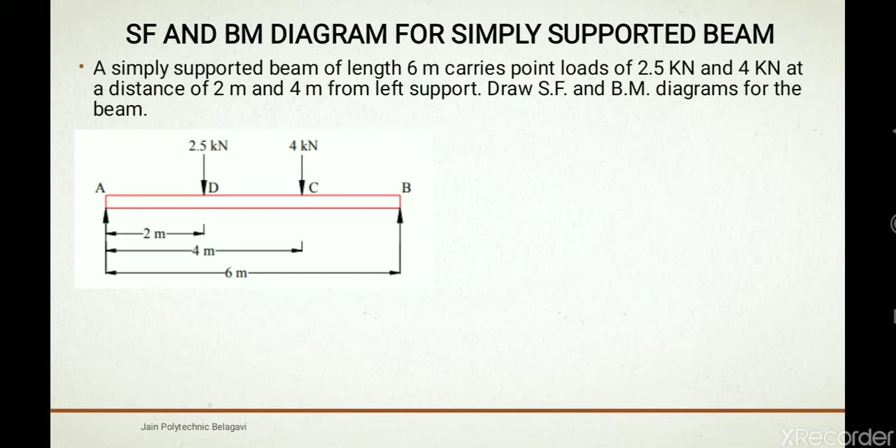So you can see here a line diagram is given along with the question. They have said that the total beam length is 6 meters, then point loads of 2.5 kilonewton and 4 kilonewton are acting at 2 meters from left support and 4 meters from left support respectively, right? The total span is 6 meters here.

So now first and foremost, we need to calculate reactions, because these two supports, support A and support B, are going to have reactions for these action loads. These are active loads, right? So these downward forces should have resistance or should be given support to balance. That is why two reaction forces are acting, that is reaction A and reaction B.

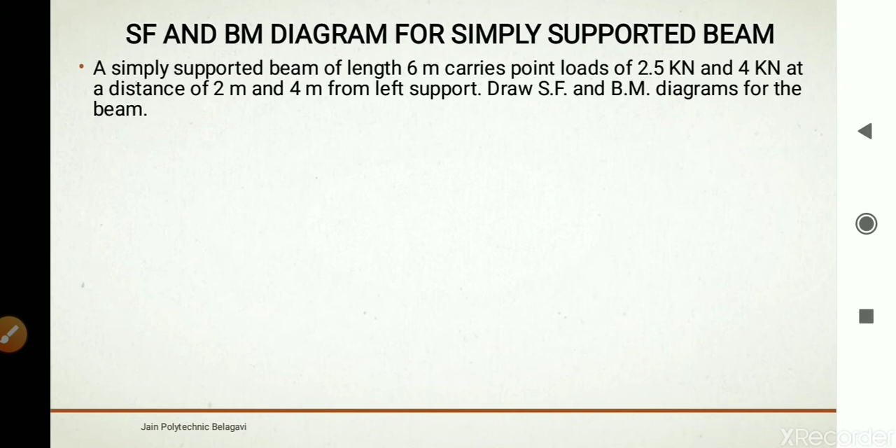So next we will try to calculate the force acting on the beam, that is 2.5 plus 4 kilonewton. So it is going to be 6.5 kilonewton acting on the beam, and reactions also should be equal. Action and reaction should be equal, so action is 6.5 kilonewton, reaction also should be 6.5 kilonewton, and that should be equal to RA plus RB.

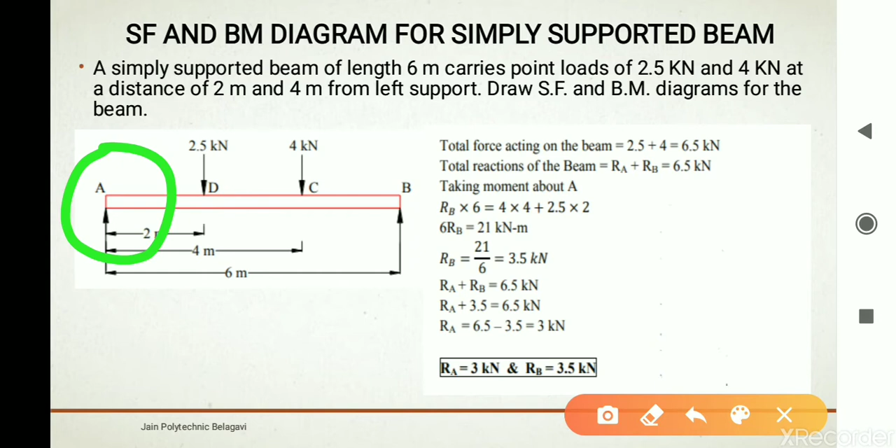Now taking moment at point A, reaction B is going to rotate the beam in anti-clockwise direction. So RB into perpendicular distance till A is 6 meters, that is RB into 6. That is the reaction moment of B towards A. This is equal to the 4 kilonewton downward force, acting in clockwise direction towards point A at 4 meters, so 4 into 4 meters.

So that is the clockwise moment towards A, plus 2.5 is acting downwards in this fashion. So load into perpendicular distance till A is 2 meters, right? So this is what is written here, 4 into 4 plus 2.5 into 2. So 6 RB is equal to 21 kilonewton meter.

So you keep RB on the left side here, and shift 6 below in the denominator. So 21 divided by 6 is equal to 3.5 kilonewton. So we got reaction at B. This reaction force is 3.5 kilonewton.

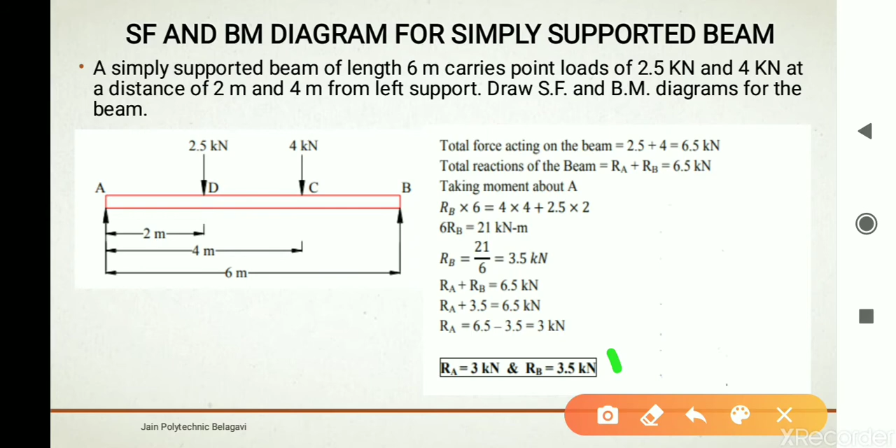Coming to next, we know action is equal to reaction, so we take the equation RA plus RB is equal to 6.5. Put the value of RB, that is 3.5, and take 3.5 towards the right side, you get reaction at A is equal to 6.5 minus 3.5, equal to 3 kilonewton. So RA is 3 kilonewton and RB is 3.5 kilonewton. So next, after knowing these two reactions, we will go for shear force calculation.

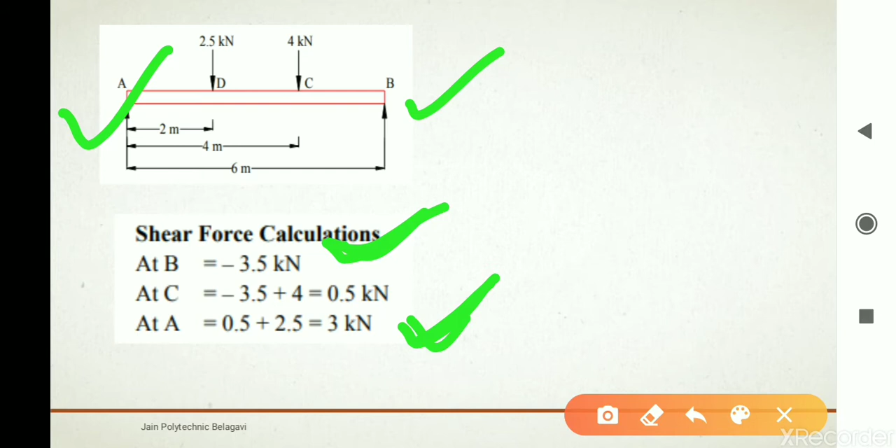So shear forces. We have this drawing for shear force calculation. Shear force at B will always be reaction at B, and shear force at A will be reaction at A. You can see here reaction at A and reaction at B are the reaction forces. Shear force at C and D is not calculated, you can find it out. So shear force at C is here.

So shear force at C will be minus 3.5 plus 4, it will be 0.5 kilonewton, or you can do another calculation, that is shear force at right of C first and then shear force at left of C. When you stand on the right side of C, you will have only the reaction acting, and when you calculate shear force at left of C, there are two forces acting for point C.

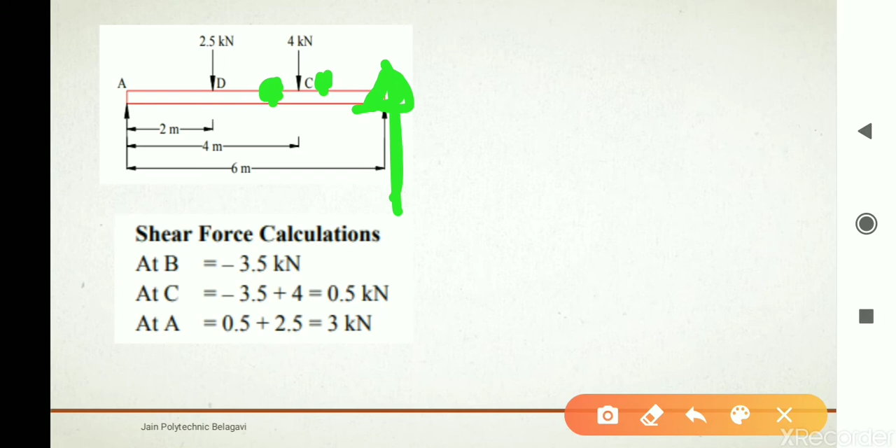So reaction at B minus the action load, that is 4 kilonewton, gives the calculation as 0.5 kilonewton.

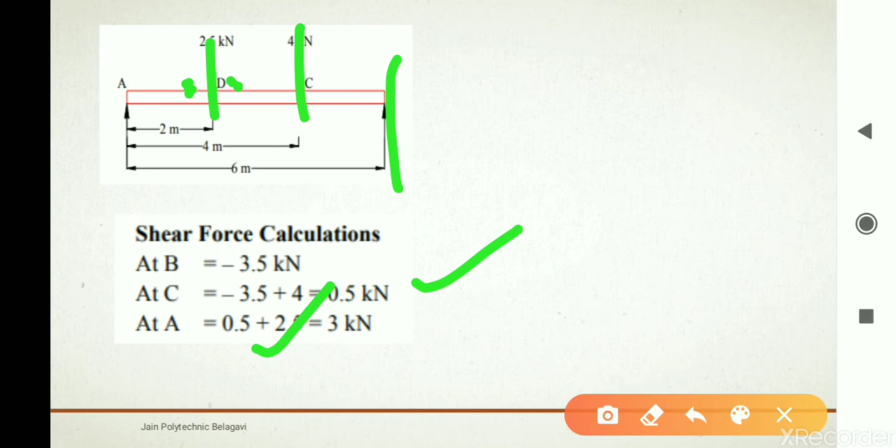Then coming to shear force at D, shear force at D right, the same thing again, it will be 0.5, because when you stand on the right side, you will have two loads acting, one reaction and action force, so it will be 0.5 again. Now shear force, when you stand on the left side of the point D, you will have reaction force 4 kilonewton and 2.5 kilonewton, so it will be 0.5 plus 2.5 kilonewton, so it will be 3 kilonewton here. So this is how you have to calculate.

So reaction at A, this should be reaction at A. Okay, same thing, reaction at A will be again same 3 kilonewton, because shear force is equal to reaction at that particular support. So this is the shear force calculation.

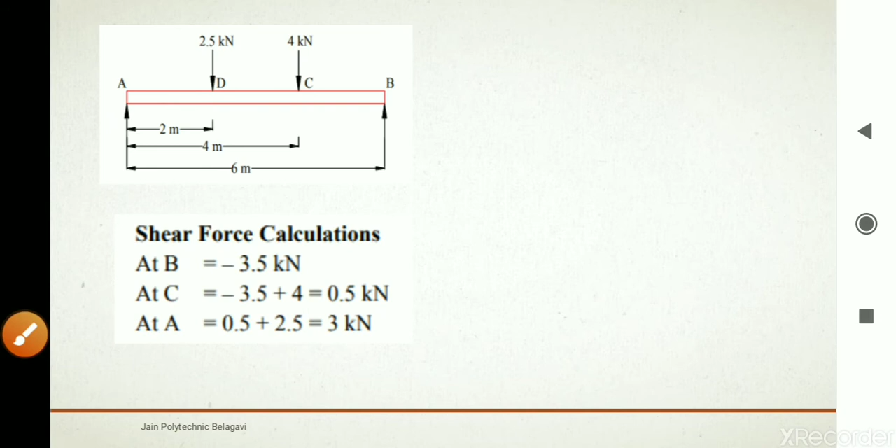Now bending moment calculation. First and foremost thing, moment at support. Okay, moment at B and moment at A will be always 0. Okay, in simply supported beam only. So in simply supported beam, the reactions or the moment at support will be always 0.

Now moment at C, if you want to take moment at C here, take only right side consideration, loads which are coming from right side. So reaction force is acting, the force into perpendicular distance till C, because we are taking moment at C, right? So it will be 3.5 reaction into this distance, that is 2 meters, because 6 minus 4 you will remain with 2 meters. So it will be 3.5 into 2, that is 7 kilonewton meter.

Coming to next, bending moment at D. So all right side forces you have to consider. So reaction into this distance, that is perpendicular distance, so 3.5 into 4, because 6 minus 2, the remaining distance is 4 meter, minus 4 into 2, so this is the perpendicular distance, this is force and this is perpendicular distance till D. Coming to next, it will be moment at A. So moment at D is calculated just now, that is 6 kilonewton meter.

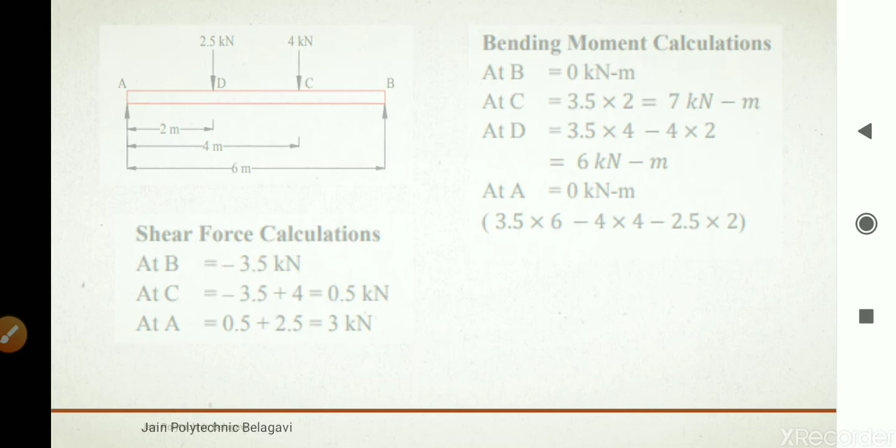Moment at A is always 0. The calculation is shown here. You can see 3.5 into 6 minus 4 into 4 and minus 2.5 into 2, right? So this is how shear force and bending moment calculation is done. Next we will see how to draw the diagrams, shear force diagrams and bending moment diagrams.

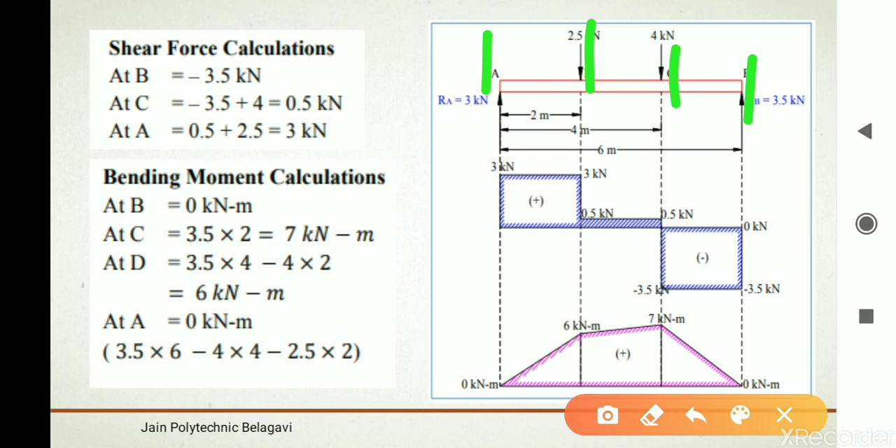So you can see this diagram is shear force diagram and this diagram is bending moment diagram. So how to start with? After knowing all the points A, D, C, B in the line diagram, project those all lines below, okay, and take one reference line for shear force and bending moment reference line at the bottom. As considering positive and negative values, just take the reference line with common sense, left and right or bottom, okay.

So next we will take the shear force diagram. So shear force at B is minus 3.5. Just mark the point below because it is minus, negative value. Coming to next shear force at C, it is plus 0.5. Just mark 0.5 because there is no load between C to B. Just go horizontal and just pull it till 0.5.

Then coming to next shear force at D, it is again 0.5 kilonewton. So as there is no load between C to D, just take this 0.5 till D in the same straight line. Then coming to next shear force at A, shear force at D, it is 3 kilonewton. So mark this 3 and end it. So join all the lines with the marked points and you will get the shear force diagram.

Similarly, you have 4 points for bending moments. Bending moment at support, that is A and B, it is 0, 0. Then bending moment at C is 7 kilonewton meter and bending moment at D is 6 kilonewton meter. So marking all those points, because all those values are positive, it will be above the reference line, okay. So next thing, after marking, join all those points of bending moment at that particular or respective locations.